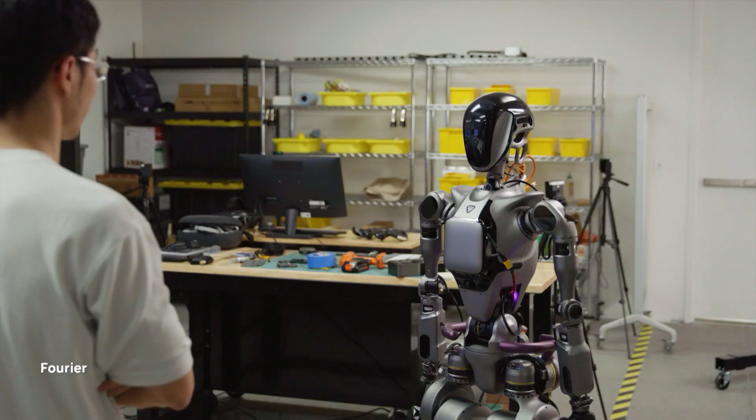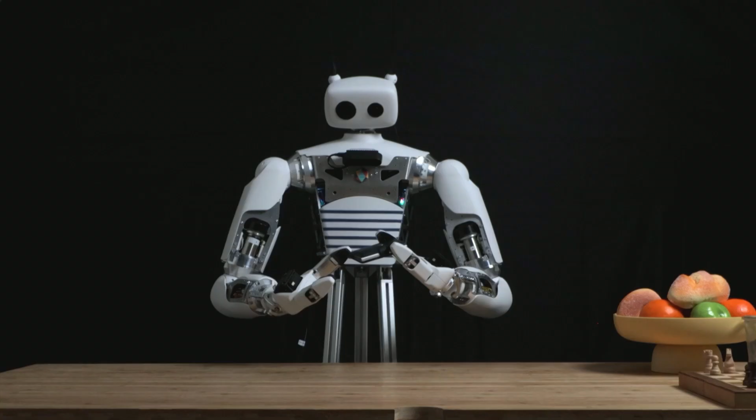Feeling good? I'm Bernadette. I'm Peter. We're still missing the third presenter. Hi.

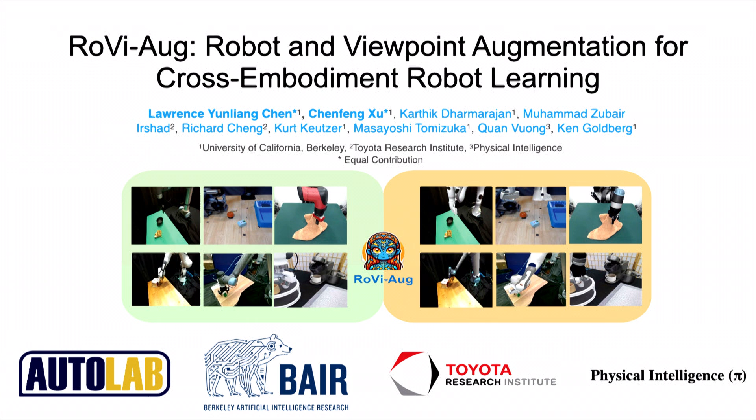Hi everyone, I'm Chenfeng. And I'm Lawrence. We are very excited to talk about our work, RoVi-Aug: Robot and Viewpoint Augmentation for Cross-Embodiment Robot Learning.

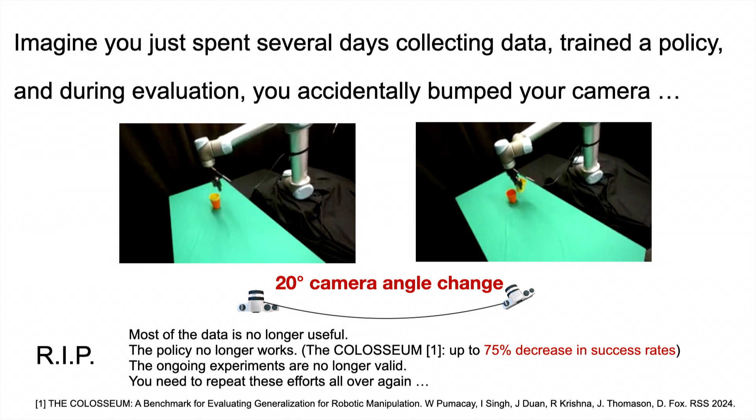Imagine you just spent several days collecting data to train a robot policy, and during evaluation you accidentally bumped your camera. Most of the data you collected is probably not useful anymore, the policy will no longer work, the ongoing experiments are no longer valid, and you have to repeat these efforts all over again. What a sad story, and unfortunately this relates to many of us because it happens quite often.

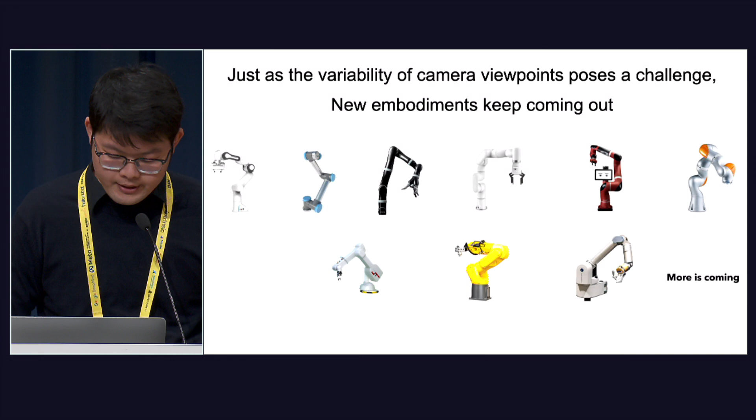Just as the variability of camera viewpoints poses a challenge for the generalization and robustness of policies, every year new embodiments keep coming out, and it's not practical to expect that we repeat large data collection efforts for every new embodiment.

The sad story is that existing policies do not generalize well to new embodiments in a zero-shot manner. For example, a diffusion policy trained on Franka robot data does not work well for the UR5 robot.

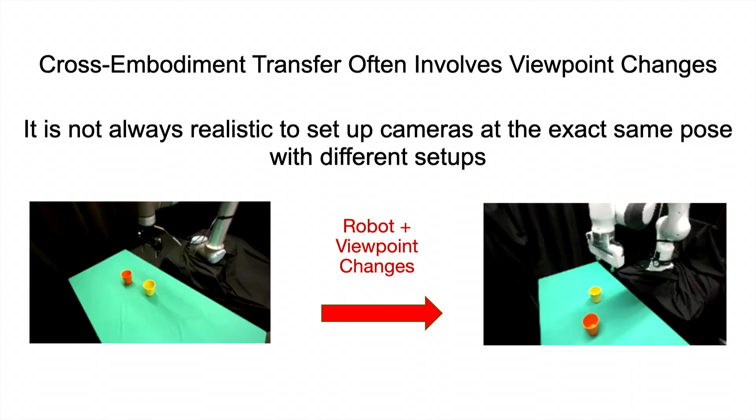Moreover, these two challenges often couple together because cross-embodiment transfer usually involves viewpoint changes. It's not always realistic to set up cameras at the exact same pose with different setups.

In this work we try to address these two challenges. First, toward the goal of making policies robust to viewpoint changes, prior work has proposed to use either distillation or contrastive learning to learn view-invariant representations.

However, both of them require simulation and have to overcome the sim-to-real gap, because it is hard to collect real data with various viewpoints.

On the other hand, cross-embodiment policies such as RT-X, Octo, and OpenVLA have shown great progress in generalization to new tasks and environments by training on large data. However, in terms of generalization to new embodiments, these models are still limited in zero-shot performance and usually require fine-tuning with target robot data.

We are quite inspired by previous work that used generative models for robot data augmentation. For example, ROSIE, GenAug, and RoboAgent use diffusion models to generate distractor objects, backgrounds, and new tasks. In contrast, we propose to use diffusion models to generate new robots and camera viewpoints.

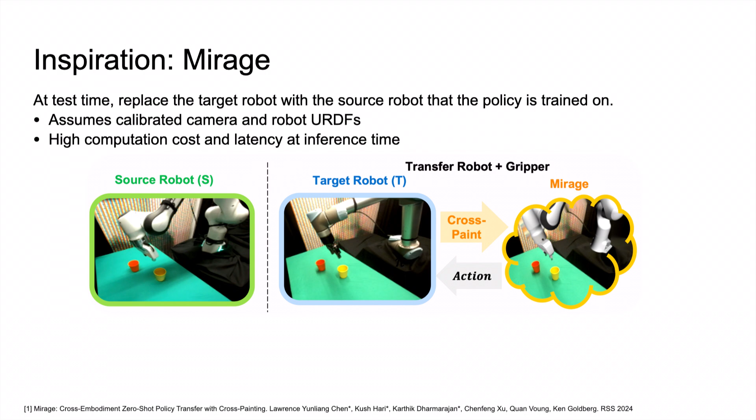We build upon our previous work, Mirage. Mirage is a test-time adaptation algorithm that works by replacing the unseen target robot with the source robot that the policy is trained on. However, Mirage assumes that we know the camera pose, and it requires high computation cost and latency during inference.

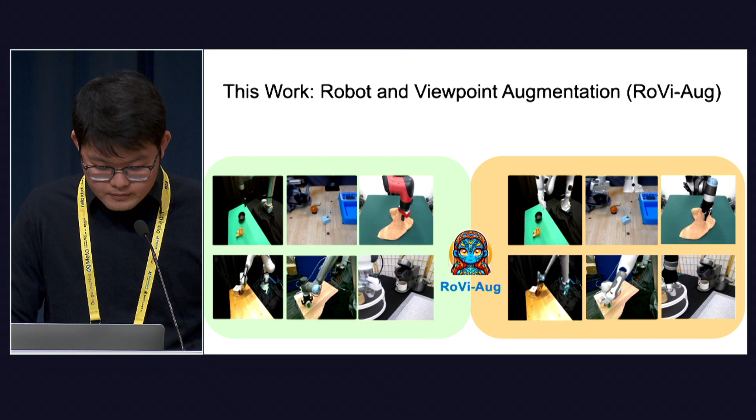Instead of test-time adaptation, we try to perform training-time data augmentation, and we introduce RoVi-Aug, the robot and viewpoint augmentation. Given one robot image, we use generative models to transfer them into new robots one by one.

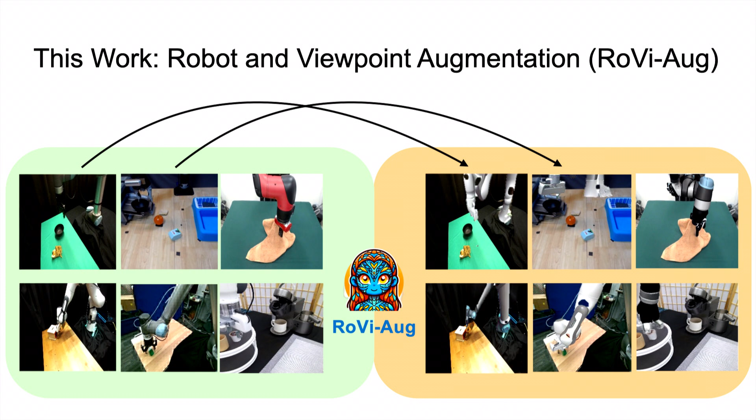So how do we achieve this? Given one robot image, the first step is to use a segmentation model to segment the robot out, and we use LoRA to fine-tune SAM. Our fine-tuning dataset is constructed by first rendering different robots in various poses and pasting them onto diverse backgrounds from ImageNet.

Then we transfer the robot into a new robot using a diffusion model. Specifically, we fine-tune stable diffusion with ControlNet. To construct our fine-tuning dataset, we generate 800,000 image pairs of different robots at the same pose from various camera viewpoints.

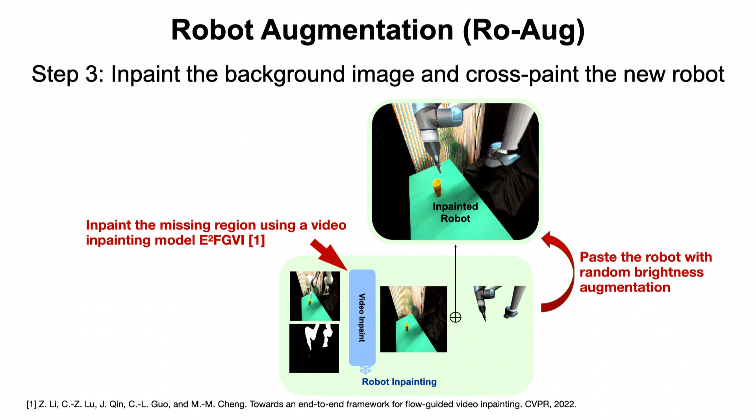Next, we inpaint the missing region using a video inpainting model and paste them into the background. In addition to the robot augmentation, we also perform viewpoint augmentation. Specifically, we use ZeroNVS, which can perform novel view synthesis from a single image.

For each robot image, we would randomly sample a translation vector and a rotation angle and ask ZeroNVS to generate a novel view.

Putting the pipeline together, we have RoVi-Aug. Given an input image, we segment the robot, transfer it into another robot, and paste it back to the background.

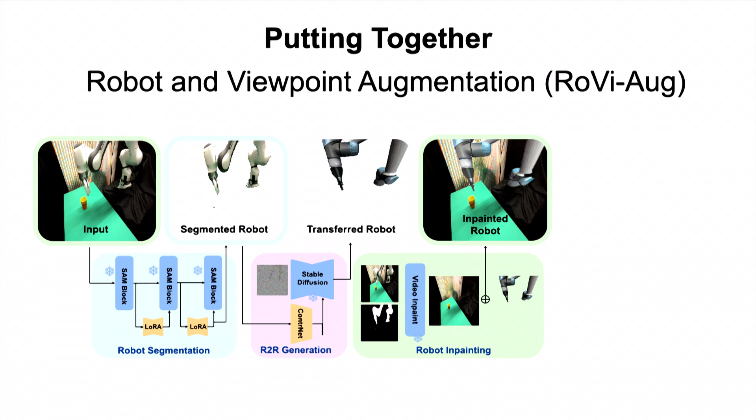We further generate novel views using ZeroNVS, which can be applied to either the original robot images or the augmented robot images. Here are some examples. The first column are the original robot images, the second column shows robot augmentation, and the third column shows viewpoint augmentation applied on top of the second column images.

Here's an example when RoVi-Aug is applied to the entire robot trajectory. This is the input video, and this is applying robot augmentation to each frame. And this is after both robot and viewpoint augmentation, and the policy will be trained on the augmented data.

To study the effectiveness of RoVi-Aug, we conduct physical experiments on two different robots, Franka and UR5. We selected 5 tasks, and here are some videos showing the source robot demonstrations.

We first study the case where the robots are changed, but the camera pose is kept the same. Without any augmentation, the source robot policy barely succeeds on the target robot.

We compare robot augmentation with Mirage, and we see that they achieve comparable performance in the zero-shot case. However, Mirage is much more computationally expensive and requires a calibrated camera.

Moreover, if we allow policy fine-tuning, robot augmentation achieves much better performance. It is important to note that Mirage does not support policy fine-tuning.

If we change both robots and camera viewpoints, then Mirage success rates decrease quickly as the camera becomes more and more different from the training views.

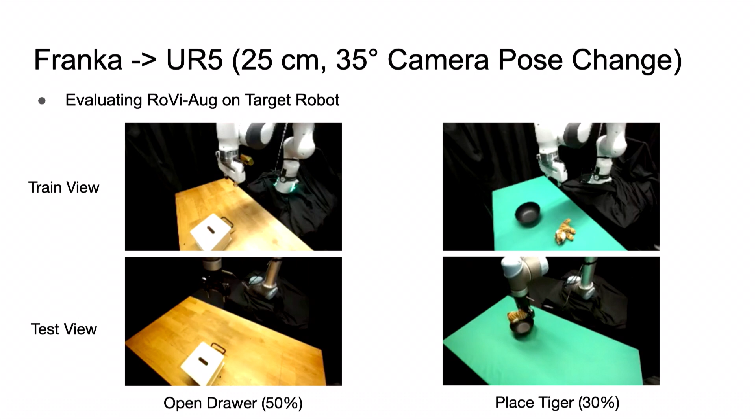Here are examples where the demonstration data is collected on the Franka and the policy is evaluated on the UR5 at test views shown in the bottom row.

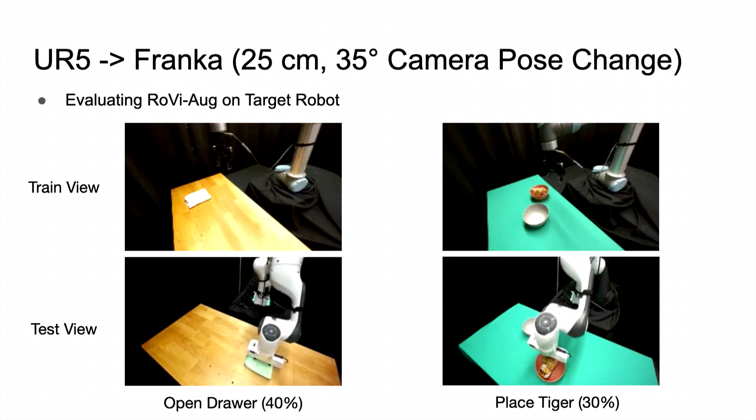Moreover, RoVi-Aug enables cross-embodiment policies that are robust even when the camera is moving at test time. Here's an example of transferring from the Franka to a UR5. And here's an example of transferring from the UR5 to a Franka when the camera is moving at test time.

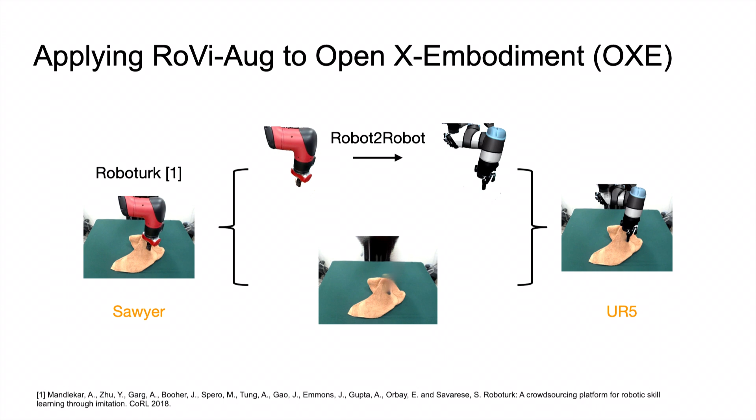RoVi-Aug can be applied to Open X-Embodiment datasets as well. Here we show an example image from the RoboTurk dataset, and we can transfer the Sawyer robot into a UR5. And here's an example image from Viola, where we can transfer the Franka robot into a Jaco robot.

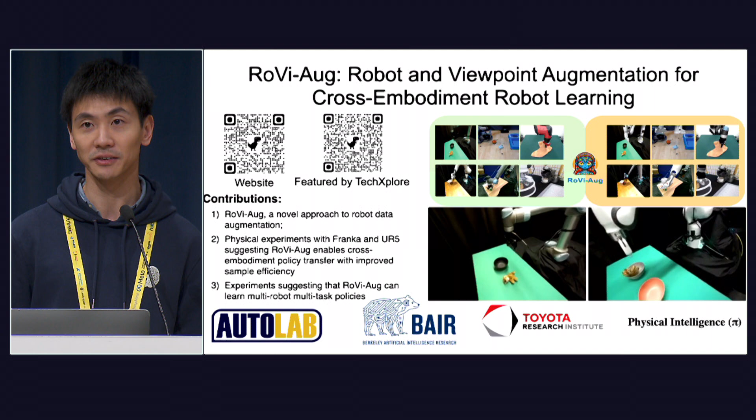Hello? Hello? Thank you. Oh, yes, sorry. Thank you very much. If there's any questions, we can start now.

Sorry, thanks for the important talk. I was wondering, what is the action space of this robot? Is it an end effector pose position or is it joint space position?

So it's end effector Cartesian control, X, Y, Z, and rotation. I see. Have you guys tested transferring joint space actions?

It would not work because we have to align the action spaces in order to do the transfer. So here we only align the coordinate frames and we do Cartesian control, and we focus on bridging the image gap, the visual gap, instead of the control space gap.

Okay, thank you. All right, one more question. There's one in the front.

Hey, thanks for the great talk. I was wondering for the viewpoint augmentation, the zero NVS model was probably trained on a certain selection of environments and objects and so on. And if you use weirder and weirder environments and objects, it probably breaks down at some point.

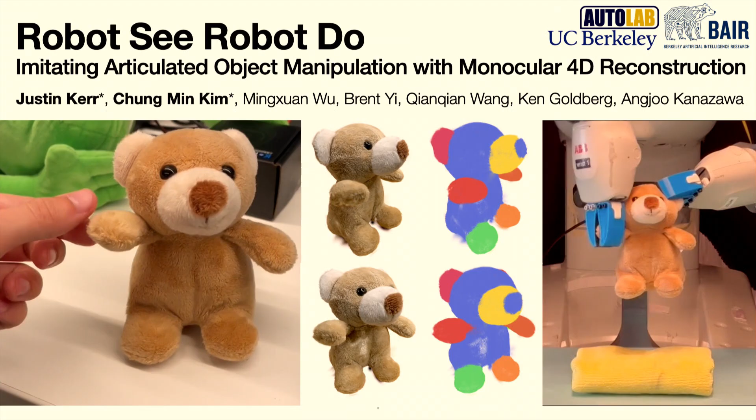Hello everyone, my name is Justin. And I'm Chung-Min. We're presenting Robot See, Robot Do, a method for articulated object 4D reconstruction for visual imitation.

Because we're in Munich, let me spin you a tale of Oktoberfest in 2050. Let's say we've figured out this whole robot learning thing, so there are household robots widespread in everyone's home, and naturally they're helping us with the festivities. Let's also say in this fairy tale world that I'm somehow German and hosting a little party, when suddenly disaster strikes, and the robot doesn't know how to open up our Hofbrau keg because it's never seen it in the training data.

So what should I do? Well, I think we can all agree that in the middle of these festivities, I don't want to have to bring out my VR goggles or whatever and teleoperate the robot. It would be great if instead I could just show it what to do with my own hands. This is called visual imitation, and we all do it extremely naturally, even from a very young age.

But for robots, this turns out to be really hard because of cross-embodiment. The gap between our human hands and our robot grippers is massive.

So let's look back to humans for inspiration, because this kid is actually doing something very deep here. You can see he's imitating the same motion using a completely different configuration, with 2 hands instead of 1. And if you dig even deeper, during the demonstration he's not even looking at the human hand at all, but rather the object. The first key takeaway is that humans can learn from object motion without adhering to hand motion.

And in this paper, we try to do the same. Now, this is not a new idea - there's a lot of related work on object-centric visual imitation, even from this conference, going from 2D tracking from key points or dense flow, to full 3D motion extraction of hand and object motion.

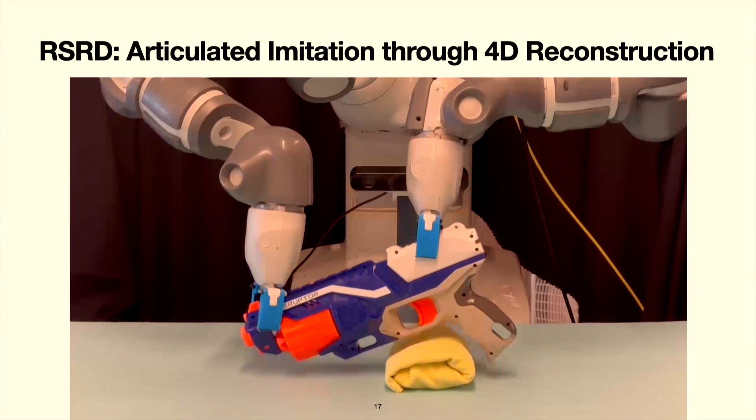In RSRD, we focus explicitly on articulated imitation through the lens of 4D reconstruction. That way, we can go from a video like this and mimic it on a robot with a very different morphology like this. So how does this work?

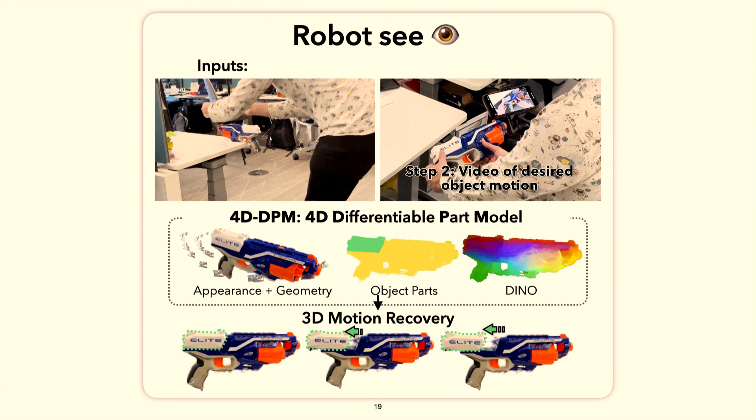As inputs to the robot see stage, we take in a 3D object scan of the object, as well as a monocular demonstration video like you see on the right, specifying the desired behavior. From these inputs, we reconstruct a 4D differentiable part model from which we can extract the 3D motion of the object.

Digging a little deeper, a 4D differentiable part model consists of a Gaussian splat of the object of interest, which we have also imbued with DINO features, which capture the rich semantics of the object and its parts, like you can see here.

The last step is that we leverage our prior work, GARField, to segment the object and divide it into its constituent subparts. This is a really nice application of Gaussian splatting because this explicit representation lets you divide it.

So now that we have the 4D DPM, what do we actually do? How do we extract the motion? We rely on differentiable rendering to do this.

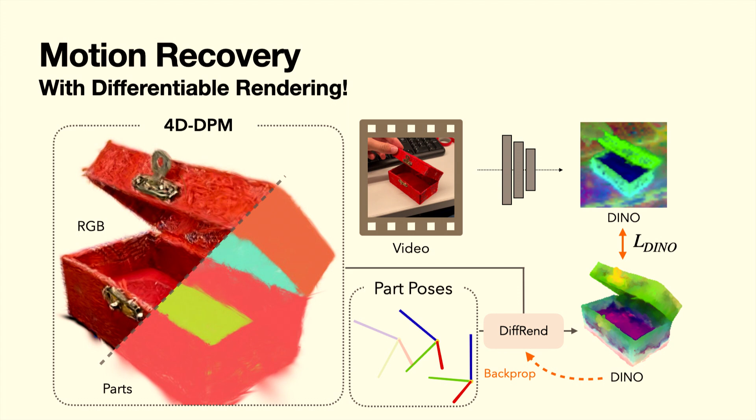We represent every part pose with an optimizable parameter from which we can render out an image of DINO features. Next, to optimize the pose, we simply subtract these features from the features we extracted from the video, and we backprop all the way through the rendering process to update all the poses.

Now you might be wondering, why do we bother with differentiable rendering instead of just a feed-forward network or something? That's because it turns out to be really useful for incorporating priors. So in addition to these DINO objectives, we use a foundation model for depth as a prior, as well as a 3D geometric regularization, which consists of local rigidity.

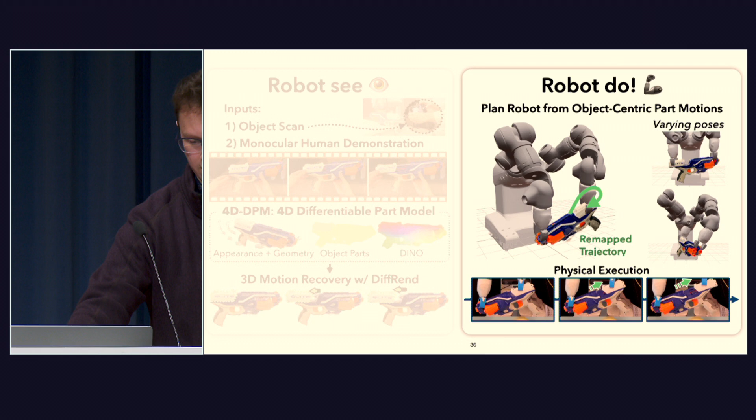So given these 3D motion reconstructions, how can we actually generate the robot actions? Well, these actions come from our hands, so because we wouldn't get the motion without them, we really want to use them. But how exactly are we supposed to do that?

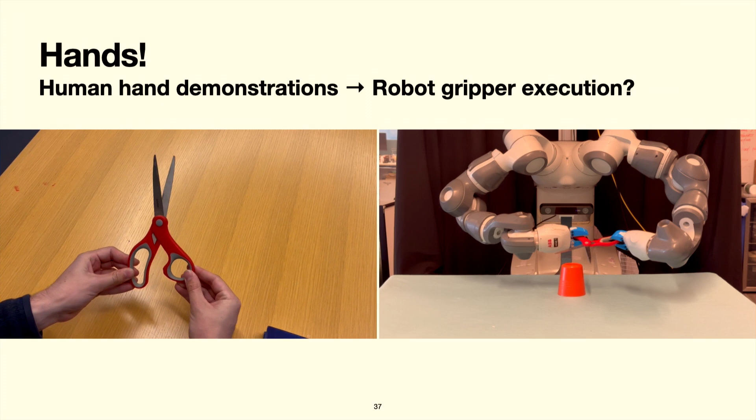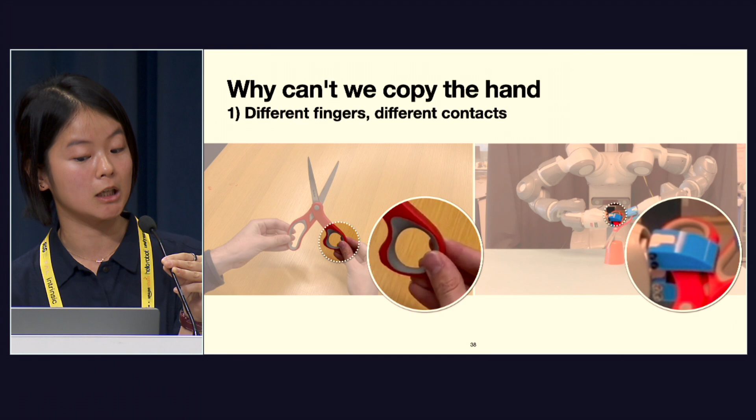Well, we don't exactly want to copy the hand because, one, the embodiment gap. Human hands are wonderful, they can do amazing things, but that's precisely the reason why we can't do the same thing, like make the same series of contacts, especially with the parallel jaw grippers. And our hands will create shifting and sliding contacts without us even thinking about it, so it's going to be in our demonstration data. Again, this level of dexterous control might not be always possible.

And even aside from the cross-embodiment problem, copying the hand might be literally impossible, depending on the scene and the initial configuration of the object. So instead, we also apply an object-centric flavor to the problem by focusing instead on the part that we care about. For example, from this video, the robot should know to grab the 2 red handles of the scissors.

So how do we get these parts? We track the hand's 3D location during the demonstration by using HaMeR, and we put the hands alongside the target object and determine which parts stay consistently close to the hand.

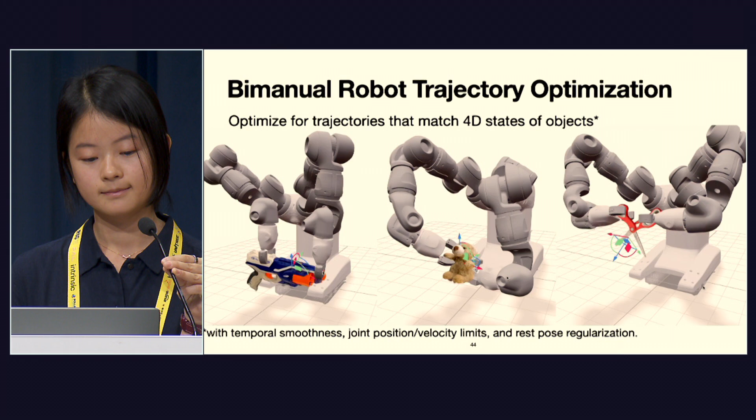Finally, with the knowledge of which parts to grasp and how they move, we can directly optimize for the robot joints that match the 4D states of objects.

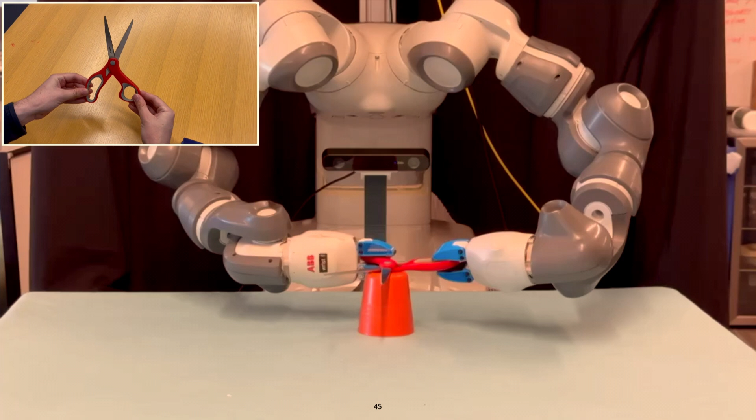Now, time for some real robots. Here, we are opening and closing the scissors, and just an interesting note, these dual arm manipulation with the rigid parts is a delicate task, because if the arms are just slightly desynchronized, the arms will fight each other and the robot might die due to torque limits.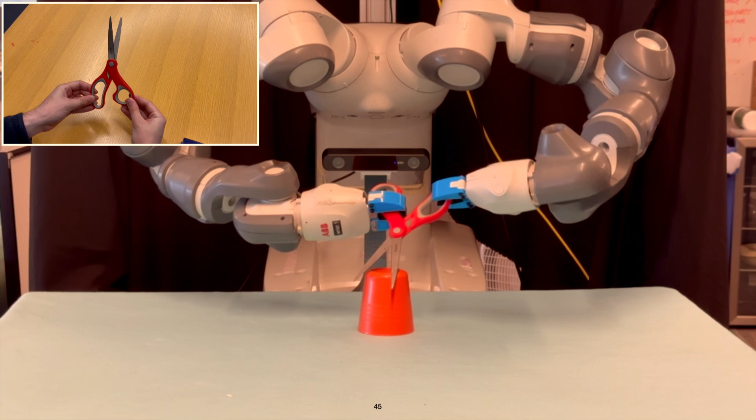So it's really cool that we can do this from copying the robot object trajectory directly. And this also works for prismatic joints.

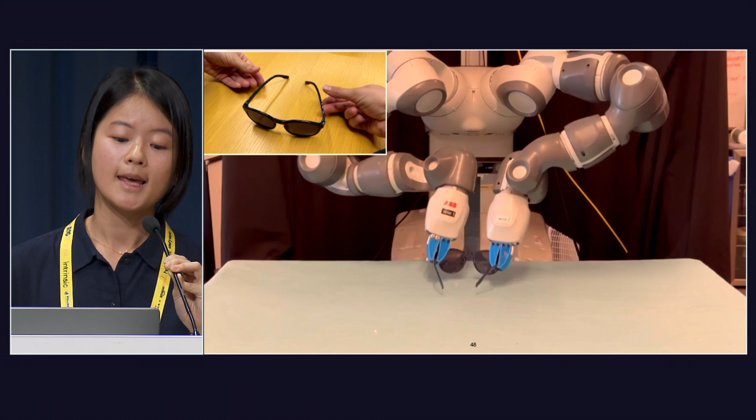And this is an example of manipulating delicate objects, such as folding a pair of sunglasses. And this is really enabled by the compliant grippers that we have on the robot.

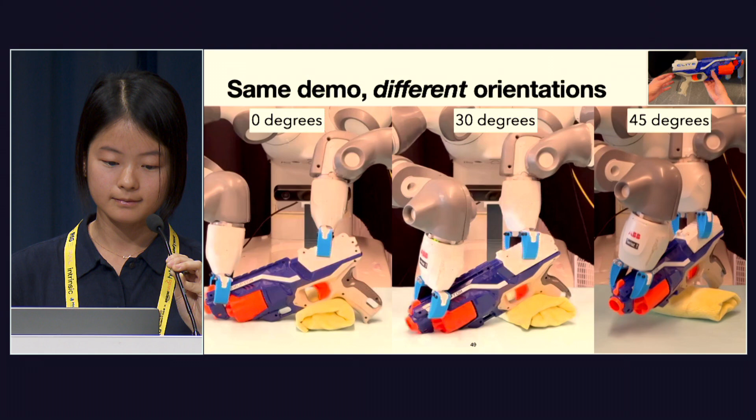And since our system is object-centric, we are able to adapt to multiple object poses given a single demonstration. And depending on the orientation, we are able to choose different grasps based on what is more accessible.

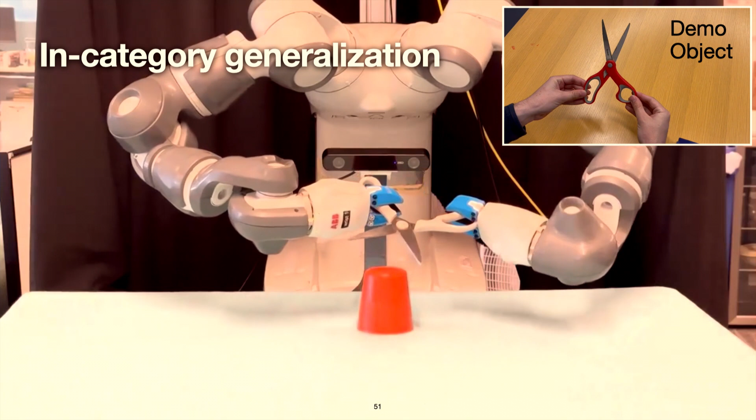We are using DINO semantic features for tracking and localizing, so we can adapt to slight variations in shape and color and get this hint of in-category generalization for free.

And a final thing that we want to close with is talking about how does RSRD fit in with policy learning, because you're probably thinking, all of this is just kind of copying motion, and we're not actually learning anything here. So I want to propose 3 ideas for how this could relate.

The first idea is for post-training fine-tuning. So let's say I've pre-trained a large robot policy, and now I can use this as a method to specify new behavior very quickly and very naturally.

A second idea is to scale from internet videos by tracking object motion on YouTube. And a third idea might be to train object-centric policies with conditioning on the object or the inputs.

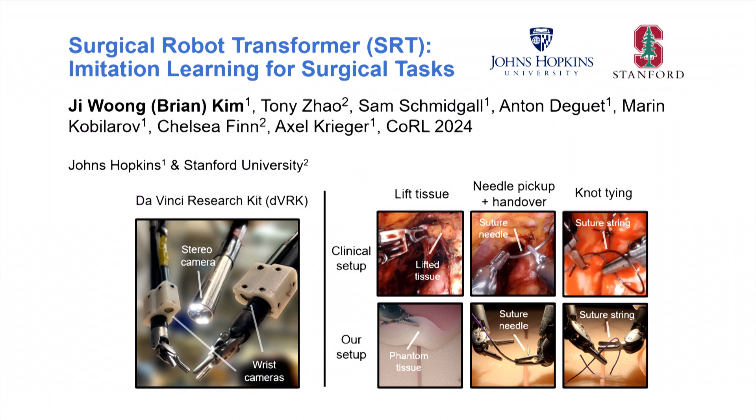Hi everyone, my name is Brian. It's really excited to be here. Thanks for listening in. So the title for today's talk is Surgical Robot Transformer, imitation learning for surgical tasks. This is joint work with Johns Hopkins and Stanford. And the main goal of this work is to start thinking about how we can automate fundamental and dexterous manipulation tasks for robotic surgery. And before diving into the meat of the work, I wanted to start from a larger perspective.

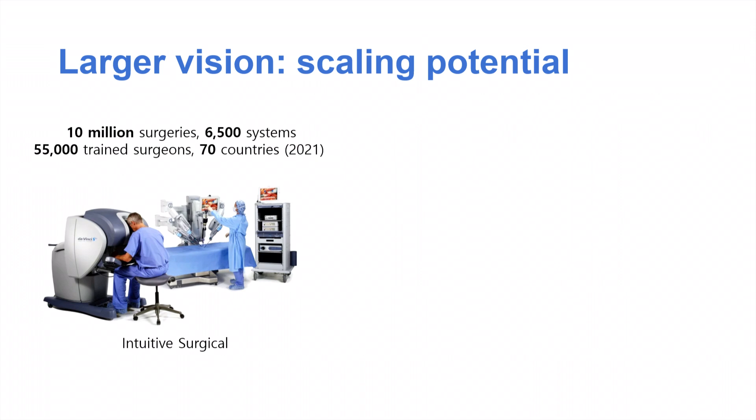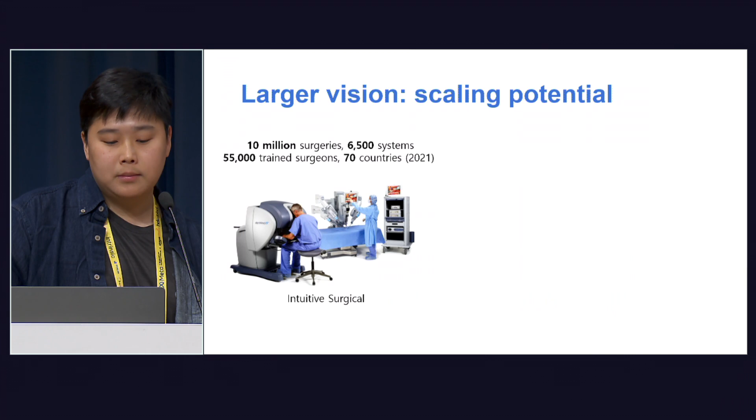Of where all this work is going and how this work fits into a larger vision. And in general, I think that surgical robots have immense scaling potential. So to give some statistics, Intuitive Surgical, the company that makes Da Vinci robots, has reported that they were able to perform 10 million surgeries using 6,500 systems, and they have 55,000 trained surgeons across 70 countries. And often the video and kinematics data are recorded, which means that it's a nice setting for exploring imitation learning algorithms and doing research on foundation models and so on. And this paper really tries to take a key step in this direction.

So one of the early things that we've tried is trying to get a very basic imitation learning algorithm to work on the Da Vinci. We have a fairly vanilla setup where we have action chunking with transformers, and we have the policy action defined as absolute position and rotation with respect to the endoscope tip, which you see in the image.

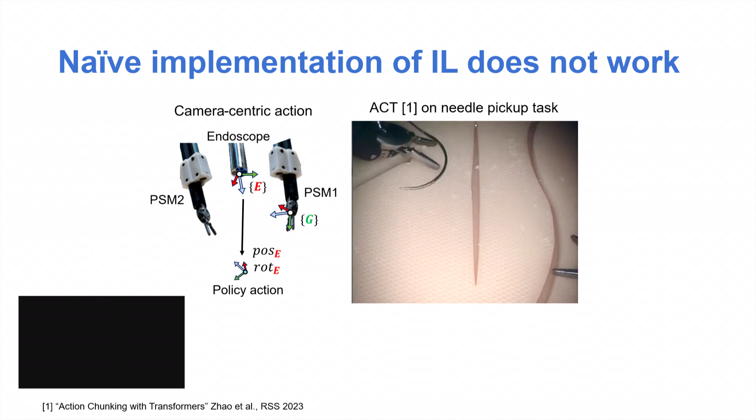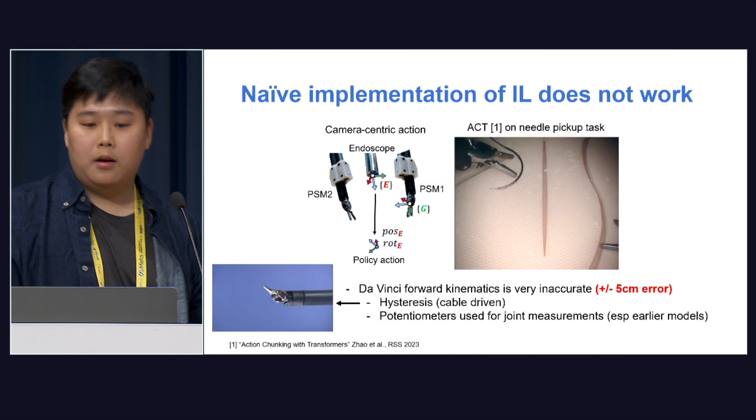And using this very simple recipe, when we actually run our policy, we find that it's completely failing, as you can see in the video. And one thing we discovered afterwards is that the Da Vinci robot is very notorious for having very inaccurate forward kinematics. The error is about plus or minus 5 centimeter error, which is really not what you see in typical robots.

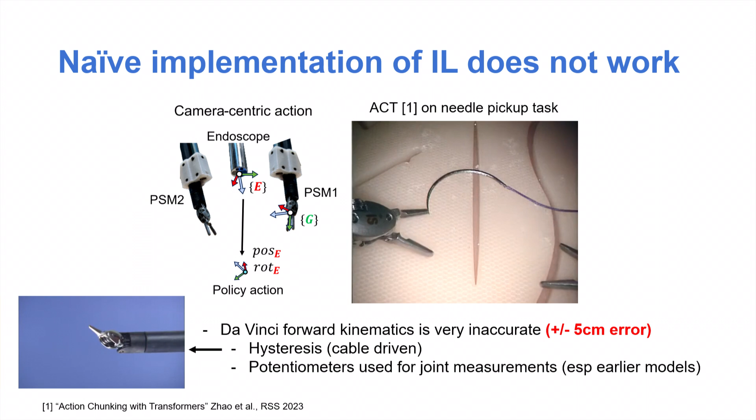And there are two main reasons why this is the case. One is hysteresis. A lot of the wrist mechanism you see is driven by cables, and these cables are subject to stretching and getting loose over time. And especially another reason is that the earlier models used potentiometers for joint measurements, and potentiometers are not very reliable sensors for measuring joints of the robot. Usually you want to use motor encoders.

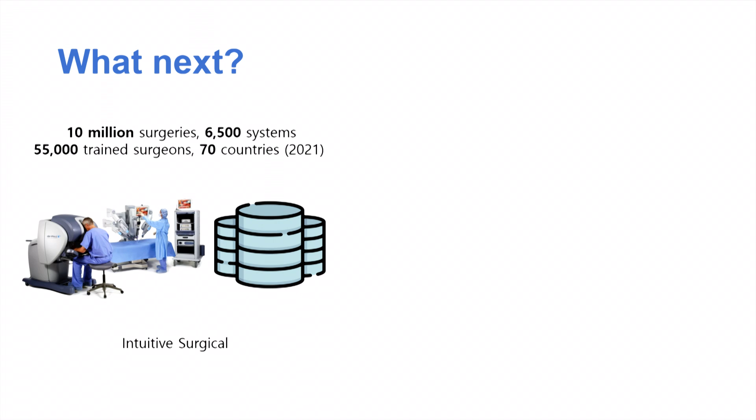And so what happens is that when you command the robot to reach a point in the workspace, it will actually never get there because of these forward kinematic errors. And that's why you're seeing that failure in the video. So what does that mean? Does that mean all this data we've collected on the Da Vincis is completely useless?

So we try to think of potential solutions. You might think, well, why don't you just do hand-eye calibration? But this is actually not a practical solution because we already assume that all this data is collected, and we cannot really go back in time and do hand-eye calibration again. So what we opt for is trying to explore an action representation so that you can directly use this approximate, inaccurate kinematics data to get a policy that actually works.

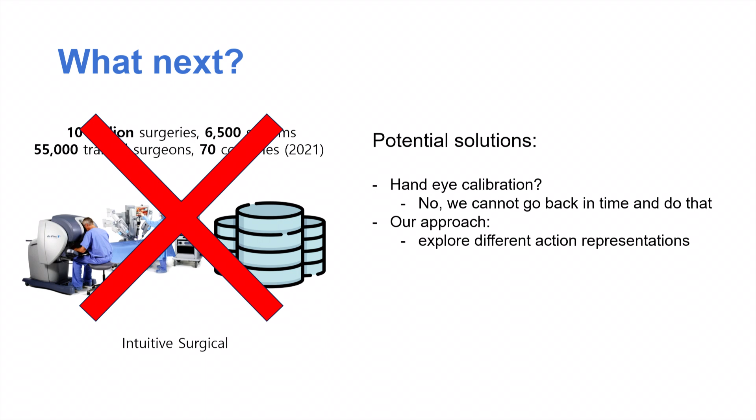And that's going to be the meat of the paper. So this leads to one of the main contributions of our work. The main idea is to use relative actions. Our claim is that even with forward kinematics errors, if you use relative actions, you can get a policy that actually works. Let me try to illustrate this roughly using a very simple toy example.

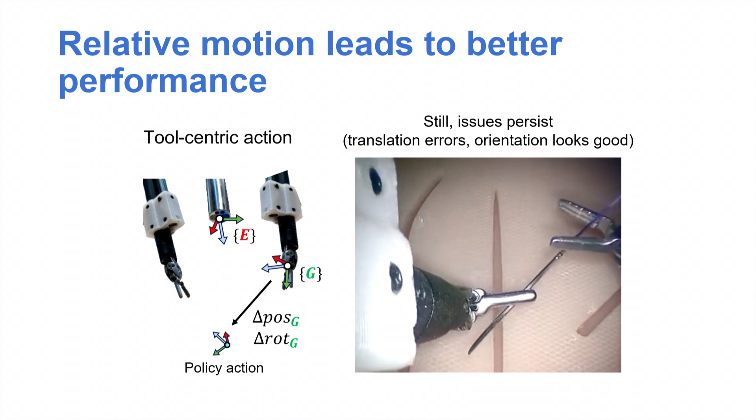So this leads to our first design iteration of action representation, where now we're defining the actions as delta position and delta rotation with respect to the current end effector frame. This is a moving body frame. And already we are able to see improvements in performance. Now it's actually able to grasp the needle, but unfortunately it's not able to complete the latter task of handing over the needle to the opposing gripper, because it's needle pickup and handover.

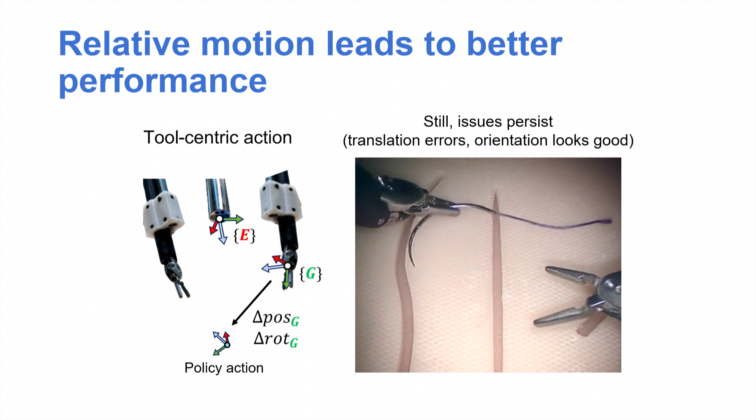Upon close inspection, we observed that the orientation of the grippers looked correct, but it's really the translation errors that were contributing to this issue. So we tried to think about why this might be the case. Roughly what the policy is trying to do is a really hard problem.

Intuitively, what it's trying to do is localize the current end effector frame based on images and generate delta position and rotation along the implicitly localized axis. This is just a lot of things you need to get right. So we just tried to relax this a little bit and say, hey, why don't we just make the delta positions defined with respect to the camera or the endoscope tip frame, so that you don't have to constantly worry about tracking the orientation of your grippers.

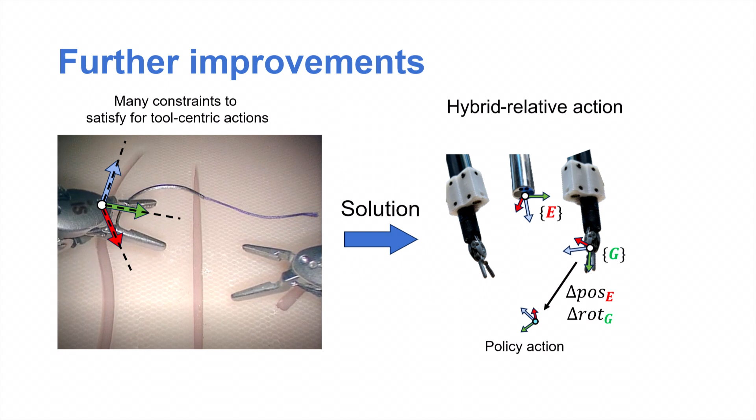So this leads to a hybrid relative action representation, where the delta position and delta rotations are defined with respect to two different frames. One is with respect to the camera endoscope tip, which is approximately the camera frame, and the other is the current end effector frame for the rotations. And this leads to pretty nice results for policy learning.

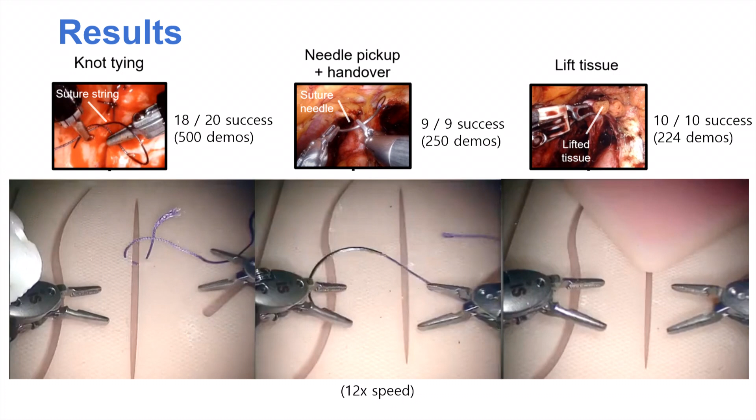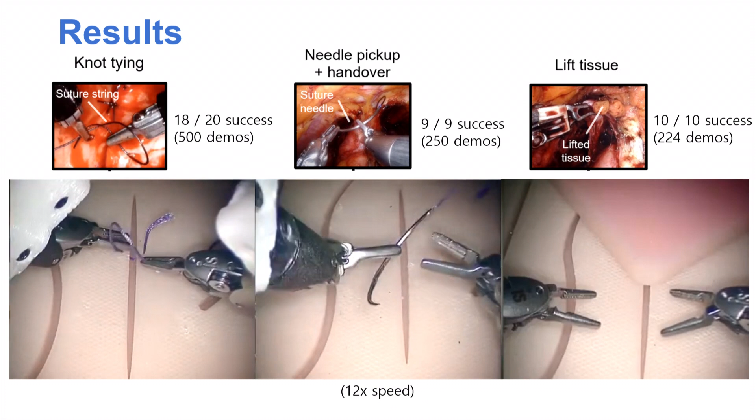So we explore three tasks: knot tying, needle pickup and handover, and lifting tissue. For context, knot tying is relevant after suturing - you want to tie up that wound. Needle pickup and handover, right before you're initiating suture, you want to make sure the needle is grasped correctly. And lifting tissue is relevant when you're trying to lift a piece of organ, or when you're doing dissection - you want to stretch the tissue so it's easier to cut and dissect.

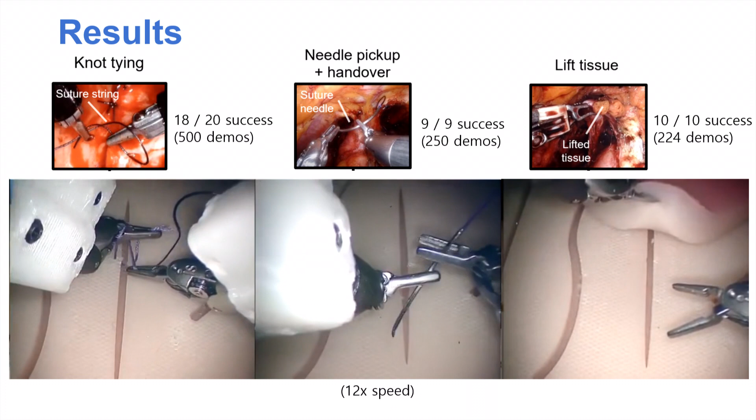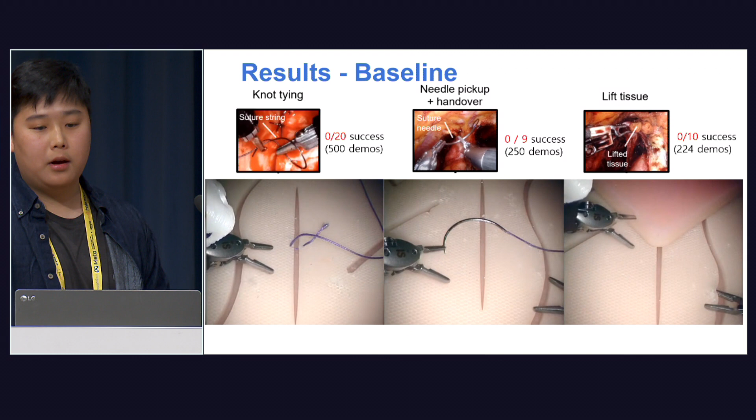We can see that with about several hundred demonstrations, you get a policy that gets about 90% or over, and it almost seems like the forward kinematics error never existed. Just to give a comparison, this is the result you get if you use absolute forward kinematics of the robot to train a policy - it completely fails, again due to the hardware constraints I mentioned earlier.

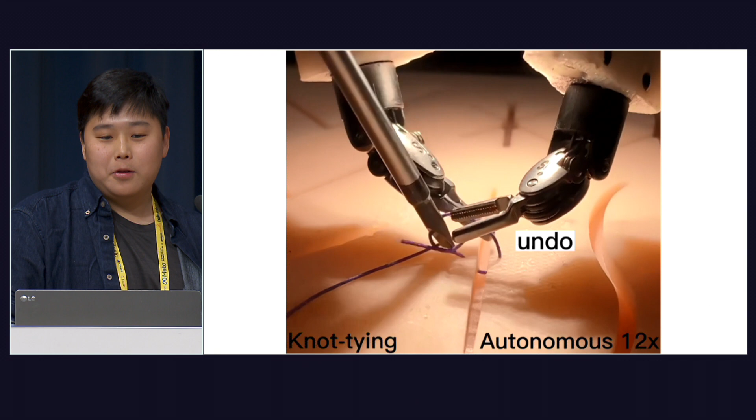And we also try to get some nice videos off of this. So here we can see that these imitation learning algorithms have built-in capabilities to kind of correct for mistakes.

Here, this is pretty cool. It can do knot tying on pork tissue. We've never trained it on pork tissue. We only trained it on this sort of yellow suture pad that you saw.

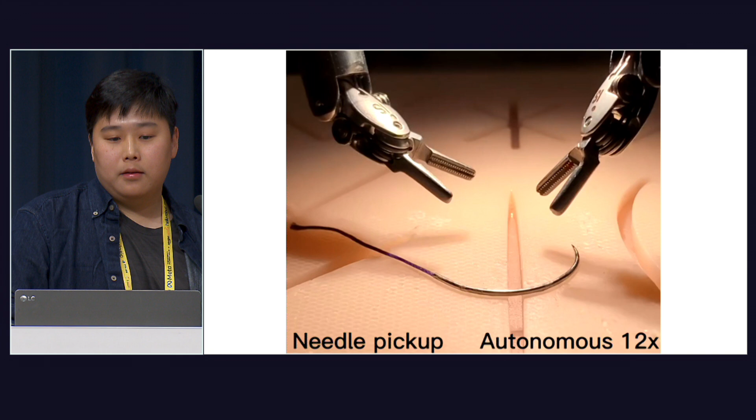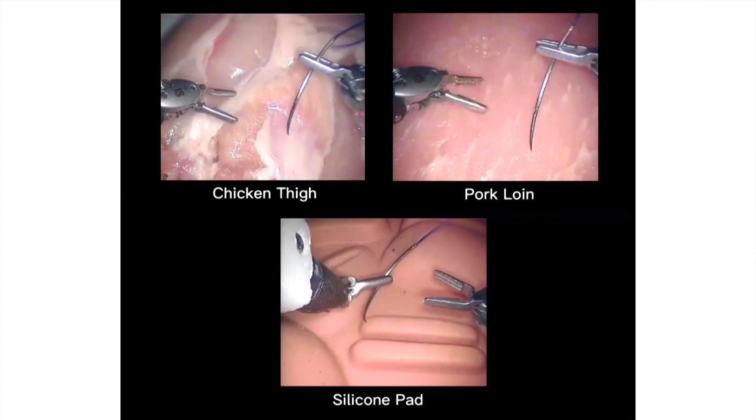It can do needle pickup. It can kind of detect that miss and kind of continue picking that up. And it can do needle pickup on various scenarios. And I think this is really exciting.

But before I finish, I wanted to give a little preview of what we've been working on, because this is really nice. You see that you can do imitation learning on this sort of confined setting on tabletop tasks, but would imitation learning be relevant for actual surgical, clinically relevant settings?

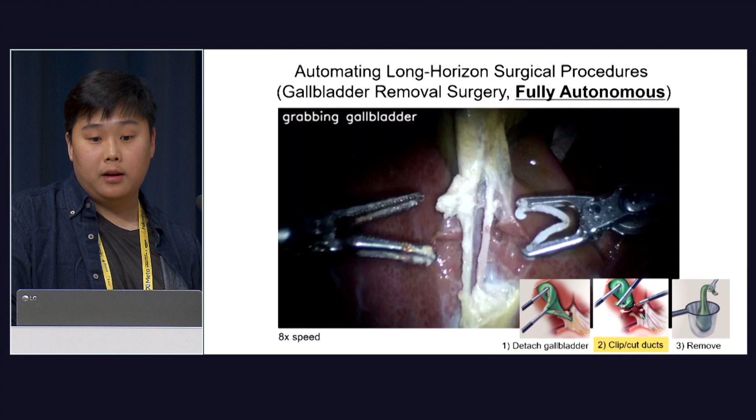So we've been exploring deploying imitation learning algorithms on real pig animal tissues. And this is a real surgical procedure known as cholecystectomy. It involves adding 3 clips, these plastic clamps that you're seeing here, on each of the tubes, and you actually have to cut them.

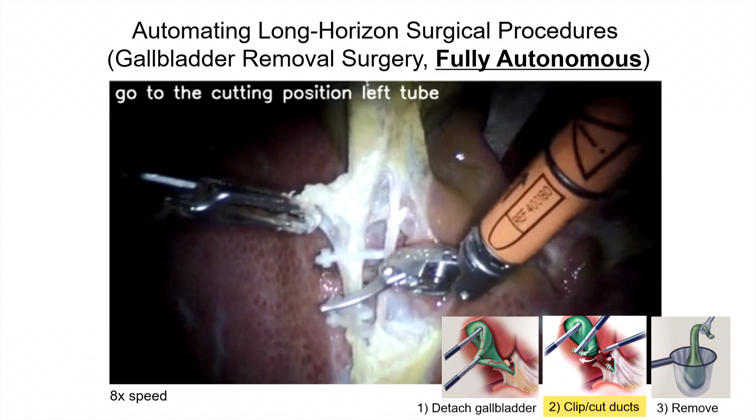It's a fairly long horizon procedure. It takes about 3 to 5 minutes. And we added some nice features like you can see in the top left of the video, it's kind of self-generating language task instructions so that it can guide itself through the long horizon task.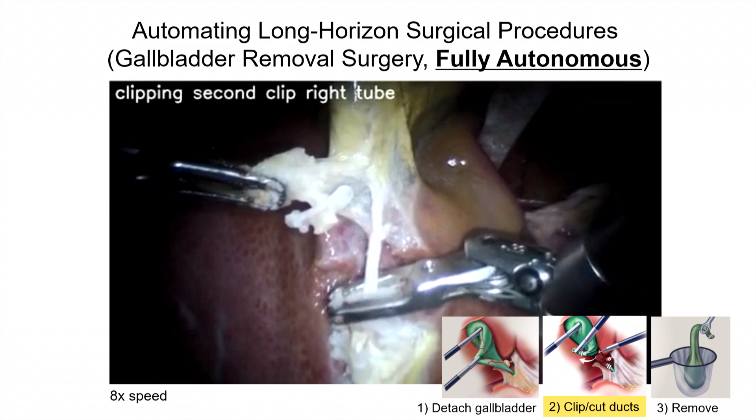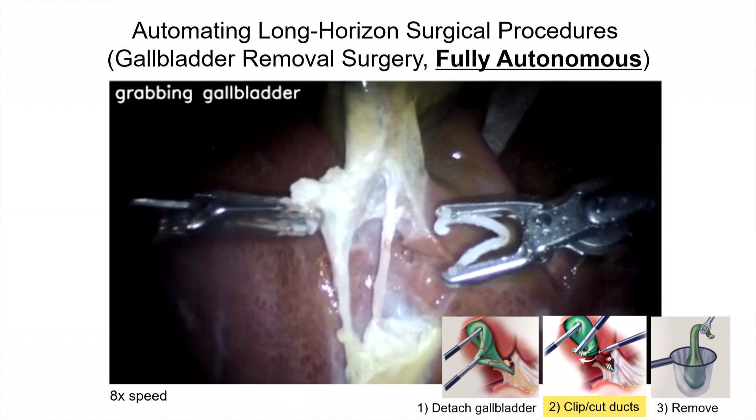And I think this is really promising because it shows that imitation learning is not something that just works in a toy environment, but something that can truly be translated into clinical settings, maybe in the near or far future. And so in summary, I think imitation learning is really promising for exploring automation in surgery.

If you have bad forward kinematics, maybe you should want to try using relative motion. It worked well for the Da Vinci robot. Maybe it works for other robots as well. I didn't really talk about this, but wrist cameras also help a lot with surgical tasks. And you can read about the performance gains we get in the paper.

And I think overall, we're really excited to scale this further with more data in the future with collaboration with institutions and companies. And I'll be happy to take questions.